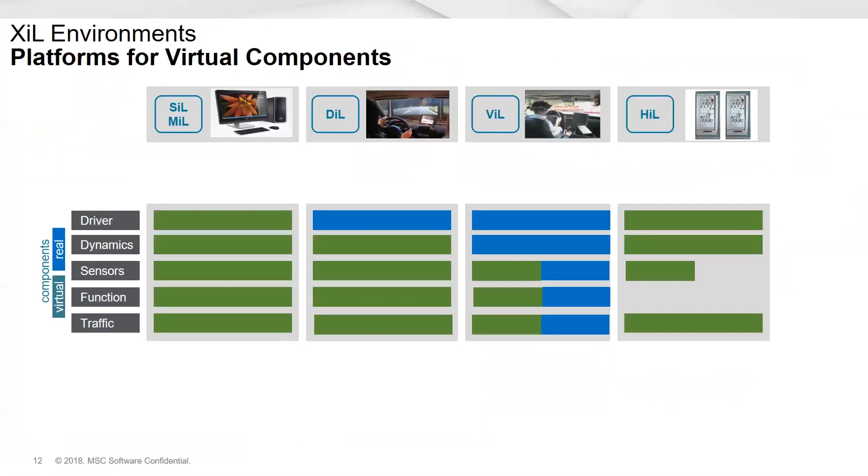Before we proceed, a key thing to mention is that in any process moving from simulation to a verification and validation or testing process, a key aspect is how VTD can move from software in the loop or model in the loop to driver in the loop, vehicle in the loop, or hardware in the loop.

This seamless ability to move between different types of environments gives our tool a lot of flexibility. If you look through each of these sections, anything marked out in blue is running in real time or is a real component, while the ones in green are virtual components.

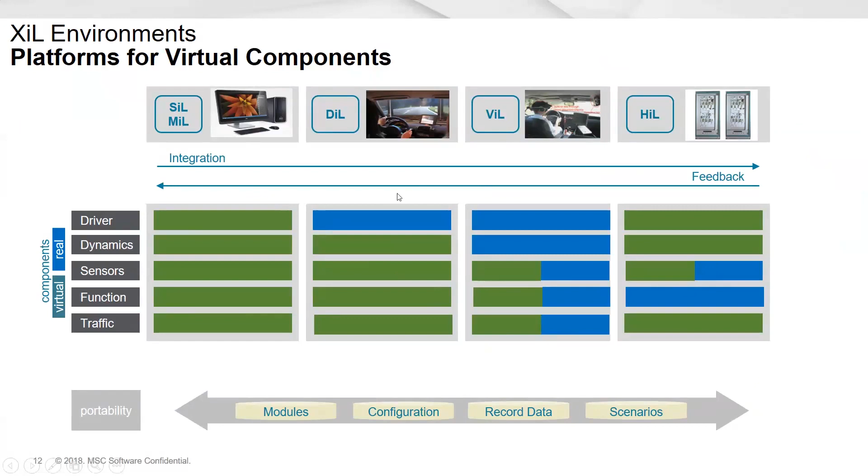For example, in a vehicle in the loop situation, you could have virtual sensors and real sensors combined, or virtual and real traffic combined. With hardware in the loop, you can also have a real ECU plus real sensors combined. The fact that we can move between these functions easily gives a lot of freedom and flexibility, which is what our customers prefer.

Going to the next step, into how Virtual Test Drive works. This is a one-slide summary of the workflow itself, and I will go into each of these sections in more detail as we continue through this presentation.

The first step when designing or working on an autonomous or ADAS function is to create or build out a 3D environment. There is a way, in fact multiple ways, to build out the static content, which I will describe in the next few slides.

The idea is that you generate a 3D environment with OpenDRIVE files to define the road networks, with graphics to define road furniture like buildings, trees, and signposts. Then, to define the road surface layer itself, you can add OpenCRG road file format data on top to define road surface friction, potholes, speed bumps, etc.

Once the 3D environment is defined, the next step is the dynamic aspect. Think of the 3D world as the static aspect, while the dynamic aspect covers all traffic elements: your subject vehicle, multiple other vehicles, traffic lights and their behavior—anything that contributes to creating a maneuver or scenario is done through our scenario editing tool. More details on this will come in later slides.

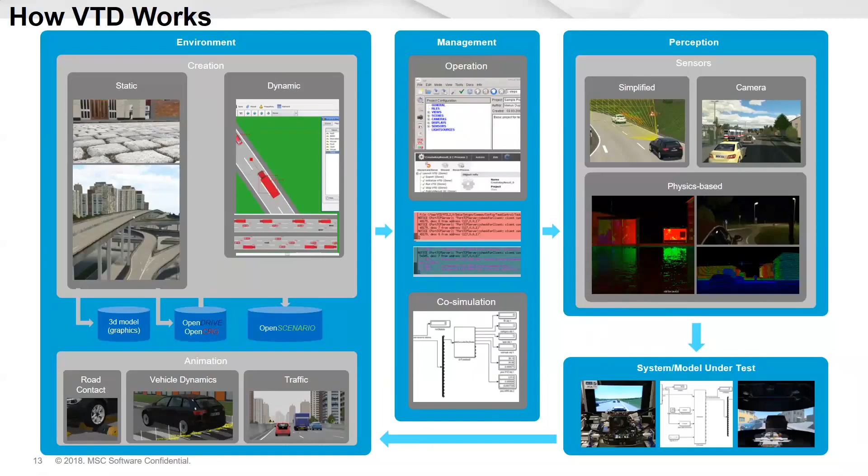The shadows that we project are fairly accurate, and we're able to take a lot of detailed material properties into account when doing this kind of animation. This is the advantage of using something that's fairly photorealistic in its rendering. Weather conditions like rain, road wetness, and road surface friction can all be taken into account as well.

So the first thing is building out 3D environments. There are two different approaches to build these out. My colleague Luca had presented briefly on this in his webinar a month or two ago, but the basic idea is you can either use a measurement-based workflow or a modeling-based workflow. The modeling-based workflow means you have no dependence on any type of measurements, and you can parameterize it.

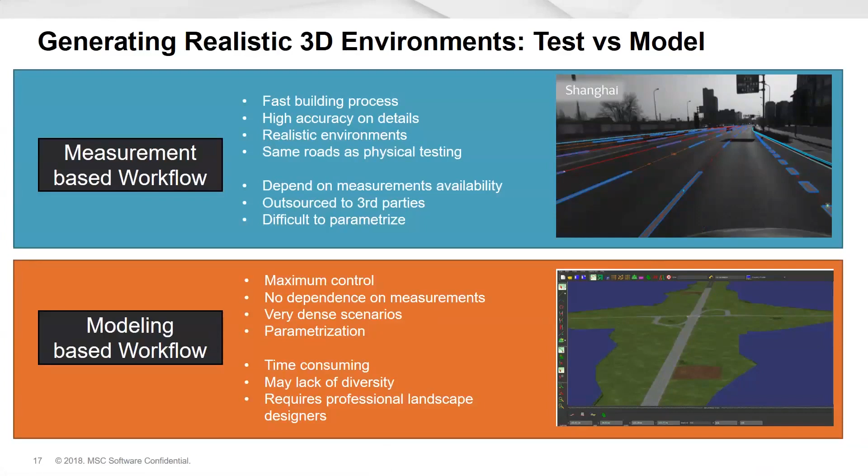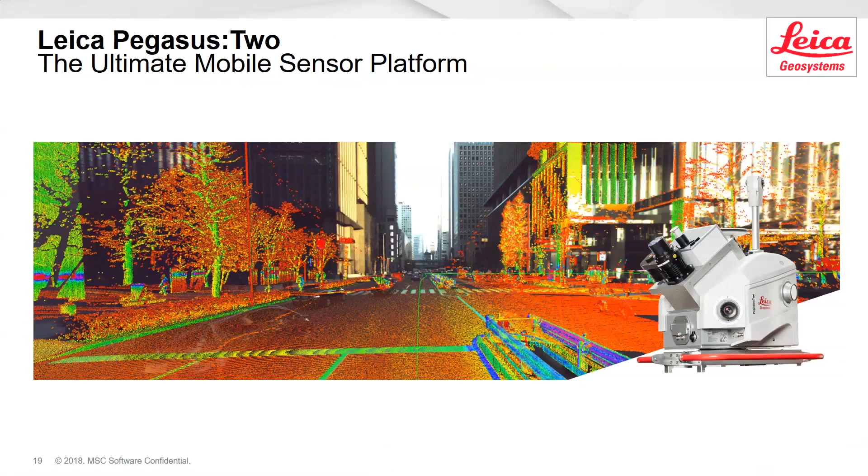When we go to a measurement-based workflow, we've been working with our partners at Leica Geosystems, and they have this unit called the Pegasus 2 that has multiple built-in cameras, a LiDAR sensor, and a precision GPS unit from Novatel, and is mountable on the roof rack of a vehicle.

You're able to get 360-degree imagery from this. The key aspect is you can drive close to highway speeds, up to 100 kilometers an hour, and scan the roads, then extract the data using the software Leica has built out to convert a lot of this data into the OpenDRIVE file format and export that into VTD.

Today we're focused mostly on getting the road information, the lane information, anything that pertains to OpenDRIVE. We're working on an OpenCRG extractor as well to get the road surface information, and longer term we'll be able to extract building textures and formats as well.

Once the 3D environment is built out through this measurement-based approach, the next step is to create a scenario. We have a tool within VTD, our scenario editor. One key thing to mention is that we support OpenSCENARIO today, and as the OpenSCENARIO standard continues to evolve, we will continue supporting it with our tool.

We have the ability to inject not only single elements of traffic, but also bulk traffic as needed within this inner and outer radius. You can specify different types of maneuvers for the vehicles. We can also do traffic light phasing and traffic light behavior, and we have various trigger options based on time to collision or pivoting about a certain vehicle.

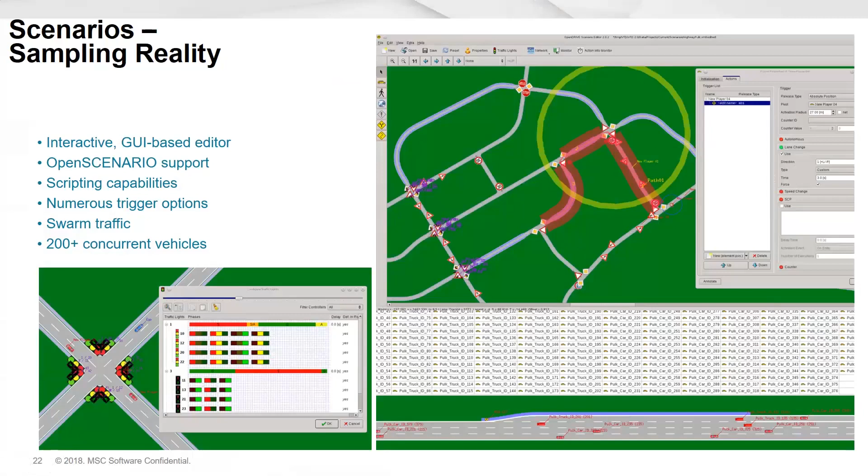The second part about scenario editing and graphics is that with each of these vehicles, you can either have what we call autonomous or deterministic behavior—meaning I could set up a vehicle and just let it follow the rules of the road, maintain speed limits, follow all traffic signs, and it will drive around very safely, trying its best to avoid any collisions or accidents.

The other thing we could also do, on the other extreme, is to give a vehicle a certain speed and a certain path, or any one of these, and then just have it do that and ignore everything else going on in the road. You can have it go into the opposing lane. You can do all of those kinds of things within VTD.

With VTD, we are able to integrate any third-party vehicle dynamics as needed, but we also have our own. VTD has two different levels of vehicle dynamics built into it, and we've also integrated our Adams Real Time, our highest fidelity vehicle dynamics model to date, available within VTD to do high fidelity ride comfort or more detailed limit handling simulations that current parametric models will not be able to handle.

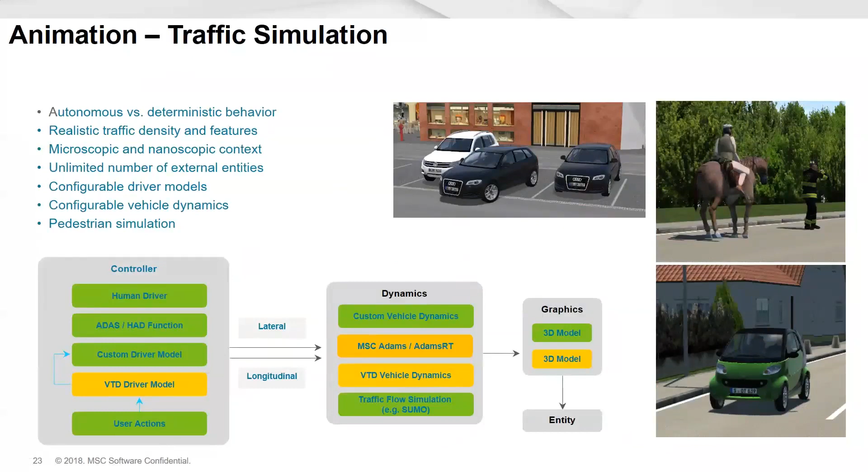We also have our own pedestrian simulation models that we are currently using within VTD.

So we do have the ability to create various types of scenarios and run them within VTD. Apart from that, we provide customers with Euro NCAP scenarios - there are about 16 or 20 currently - for them to be able to do any type of Euro NCAP scenario simulations. And apart from that, we have a bunch of other example scenarios running within VTD as well.

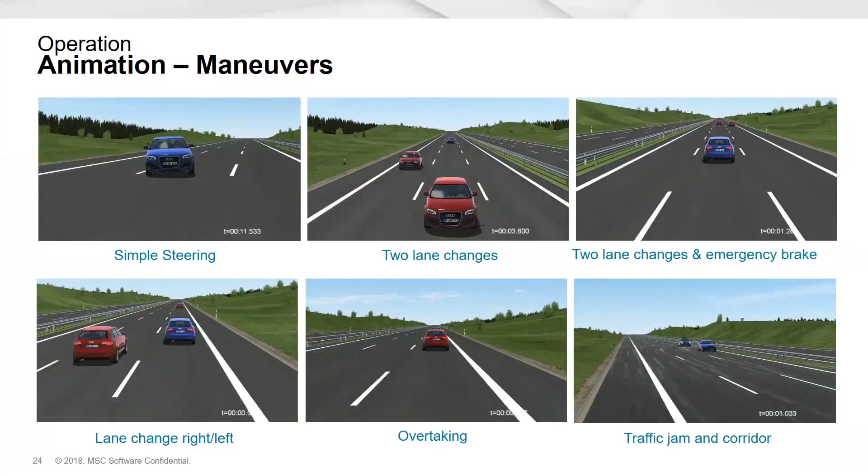So going from the execution of the scenario to being able to run it, the next step, like I mentioned in that workflow slide, is sensor modeling and doing perception studies. Now there are two ways to address this perception aspect.

One is doing the post sensor fusion, object list based perception, which is mostly used for motion planning and control. And the other side is the perception aspect itself, which deals with camera models or LiDAR models to do actual perception work.

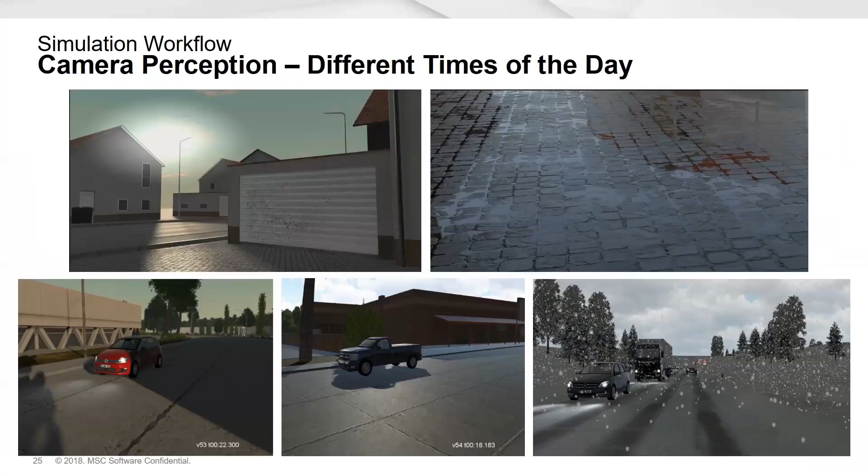As you can see here, we're able to take into account different weather conditions, different times of day through our physically based rendering approach, which means we apply detailed materials and textures per element in VTD and are able to get different returns of light for doing very accurate sensor modeling.

We also have the ability to do headlight simulation and headlight intensity simulations, taking into account different weather conditions, different reflections, and all of those kinds of things, whether it's wet or dry, being able to take all of that into account.

Given the fact that you can do a lot of this in software in the loop, the next natural progression is a hardware in the loop approach, where you can put the camera itself that you're using for your automotive application in front of a screen and have VTD run the simulation in front, to see how well the camera is able to detect objects.

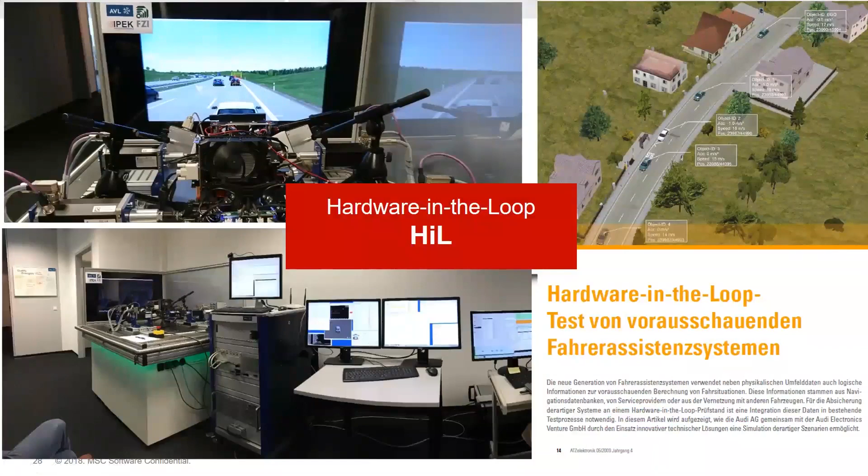The workflow looks something like this, where you have the scenario itself being run with some traffic simulation. You have your vehicle dynamics in here, and then the image generation goes into a screen that the camera perceives, and then the driving function, if you have any, can be deployed directly within VTD, and you can see how the whole system works together. It's a closed loop operation, running in real time.

The other approach we can also use is a video interface box that would replicate the imager, bypassing the camera lens and feeding data directly into the camera ECU. This would work well in high contrast situations where the monitor might not be able to capture the image well enough for the camera to perceive.

So given that, moving on from cameras, we also have the ability to take into account LiDAR simulations, where we do physics-based LiDAR point cloud generation, calculating the intensity of these point clouds based off the distance from the subject vehicle, and we color code all the different points.

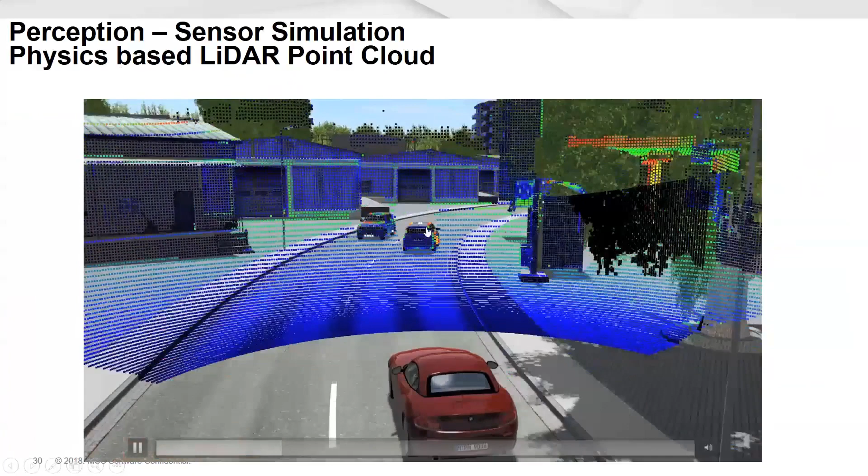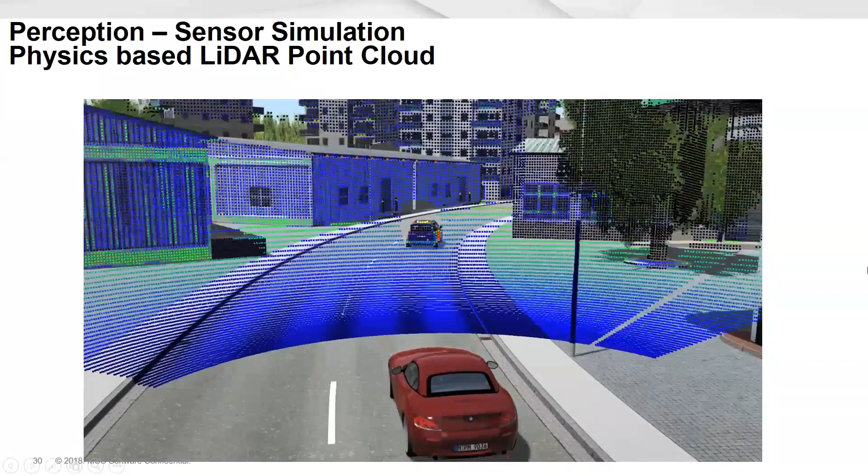Here you can see that when the light hits this vehicle, it doesn't just pass through it, so there is this empty zone here. We're trying to be very physically accurate in terms of how we calculate the LiDAR hit points and the returns within VTD. This point cloud simulation runs today in real time using an NVIDIA GeForce GTX GPU.

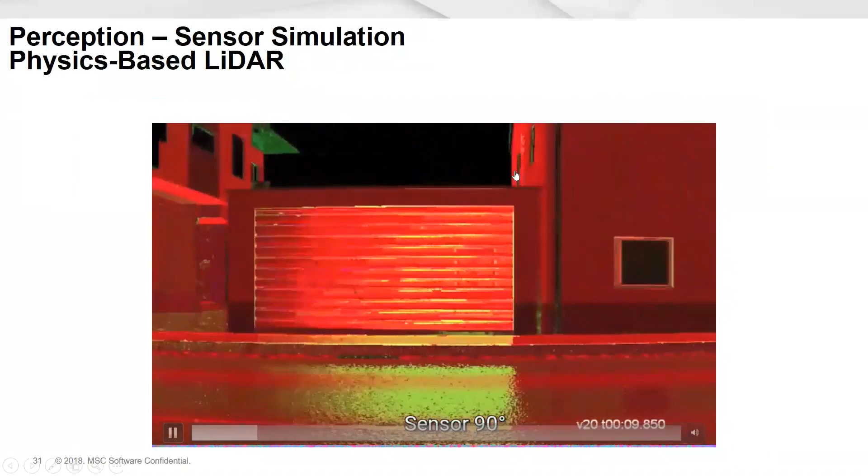We also, with the use of NVIDIA's Optix ray tracing capabilities, are able to do real-time ray tracing here, as you can see. In this example, we've color-coded the environment into red, green, and blue, where red is the direct hit of light, green is the first reflection, and blue is the second reflection.

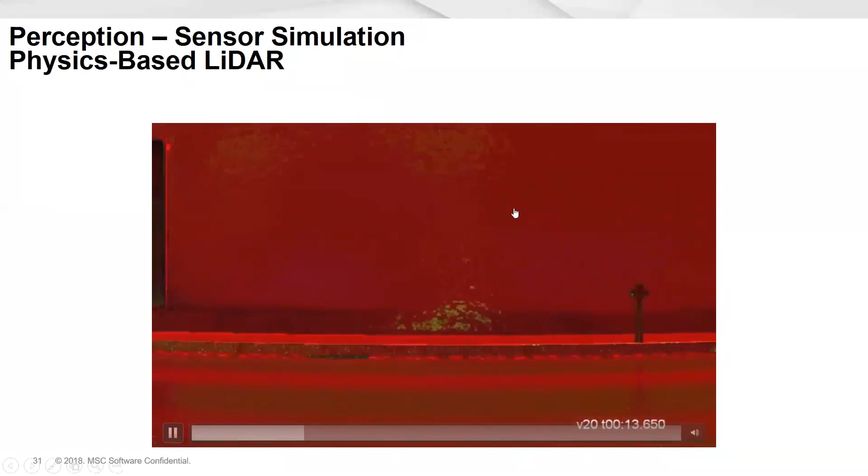So as you can see here, if the wall is rough, the light does scatter and disperse, and we're able to take those things into account when running this simulation in VTD.

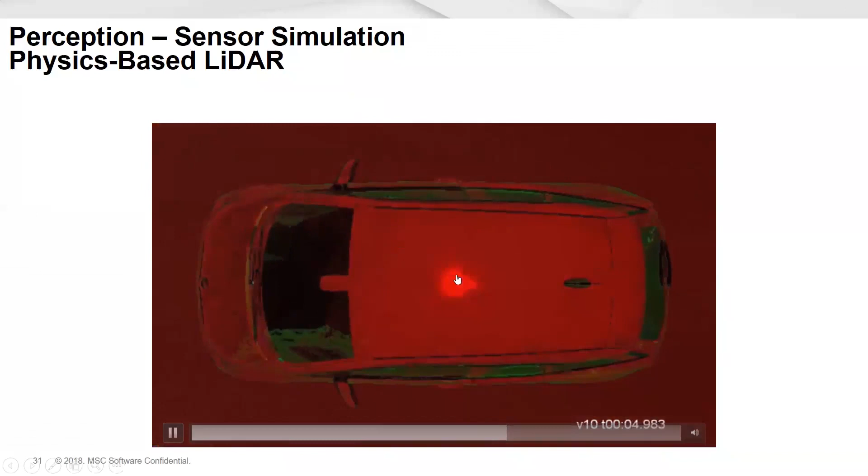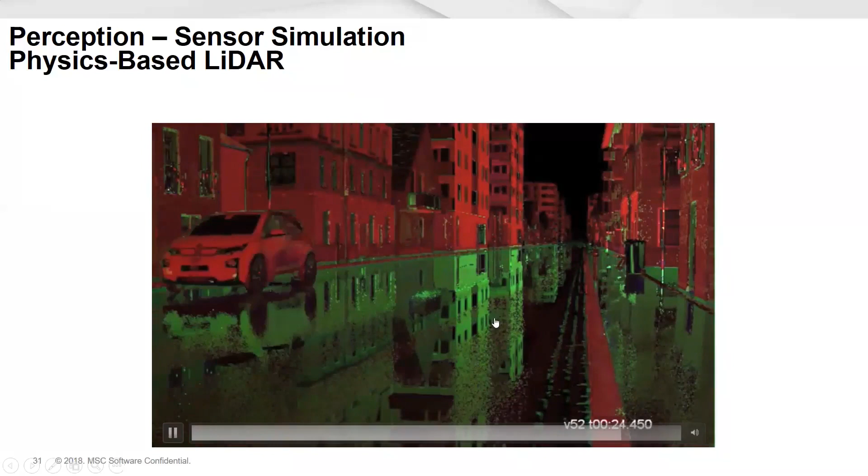Apart from that, not only with different types of surfaces, but when you have a clean versus a dirty surface, you'll see there is a difference in the surface reflection as well. And when you go between dry and wet, again you see a big difference in how much of that green light increases versus the red, because you're seeing more of the reflected light. We're able to take a lot of this into account in VTD using the ray tracing engine and running it in real time.

So this is really important for a lot of the LiDAR simulation work that people are doing on the perception side.

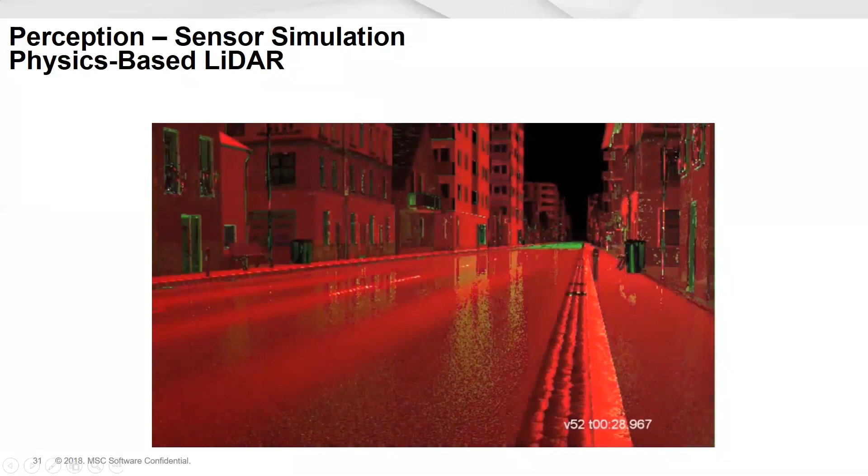Going into the post-perception aspect a little bit here, and briefly staying on the perception part, we can also do color coding of objects. So if you're doing semantic segmentation studies, we have the ability to color code all the different objects in the environment, and you can use this to do semantic segmentation studies in VTD.

As I briefly mentioned, we also do the post-perception, the ideal sensor or object-list-based sensor, where we put bounding boxes on each of these different objects and are able to derive the ground truth information for each of them.

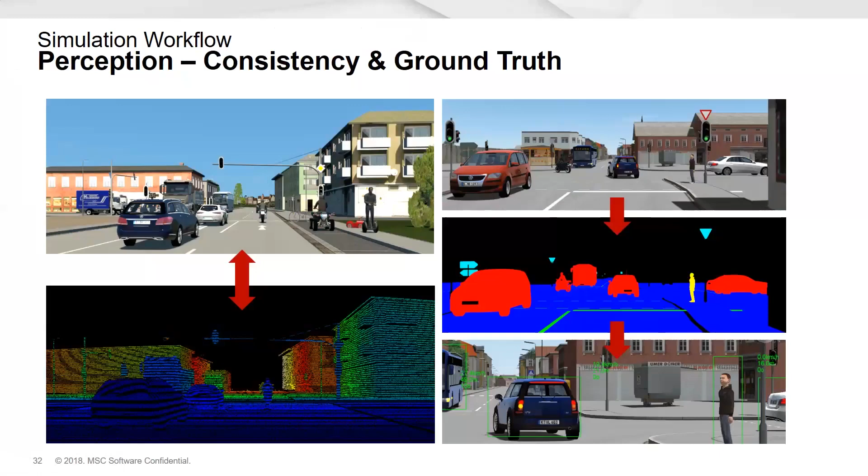Now, if objects are partially or fully occluded, we're also able to take that into account by not only measuring the distance from the subject vehicle, but also measuring the occlusion through an occlusion matrix, calculating what that occlusion matrix is and presenting it back to the user when the simulation is running. So you get an account of both partially and fully occluded objects for each of these object-list-based sensors.

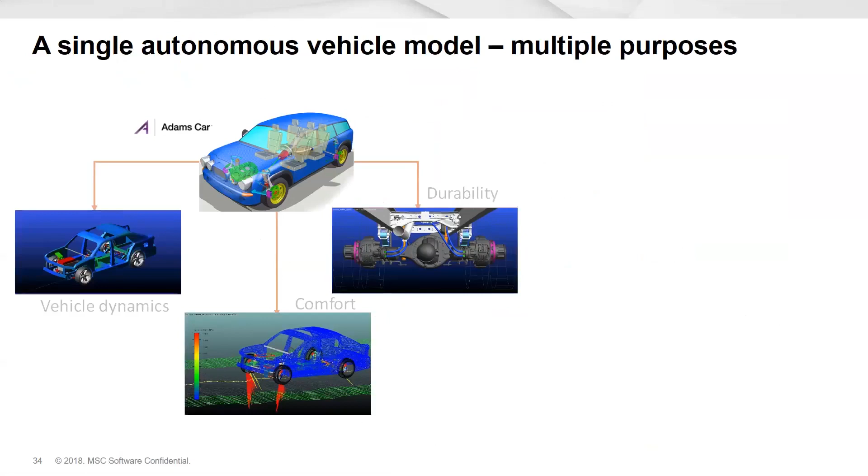Also, since VIRES and MSC are now all part of the same company, we've been working together to closely integrate our high-fidelity Adams Car vehicle dynamics models with VTD. Just a brief mention of what Adams is: it's our multi-body dynamics solution that's been around for over 40 years and is one of the most trusted vehicle dynamics software tools in the world, the highest fidelity vehicle dynamics software tool available in the market today. We're able to connect Adams to VTD to run our simulations as a co-simulation or as an FMU.

The advantage here is that you can go both ways, where you can run Adams in real time to take into account limit vehicle dynamics that has enough nonlinear behavior that simple or parametric vehicle dynamics models don't take into account. The second thing you can do with VTD is run it slower than real time, so you can do higher fidelity vehicle dynamics or modeling aspects like ride comfort or durability studies within Adams. So the 3D environment and the sensors come from VTD, and based off of the perception, the vehicle behavior and analysis can come from Adams.

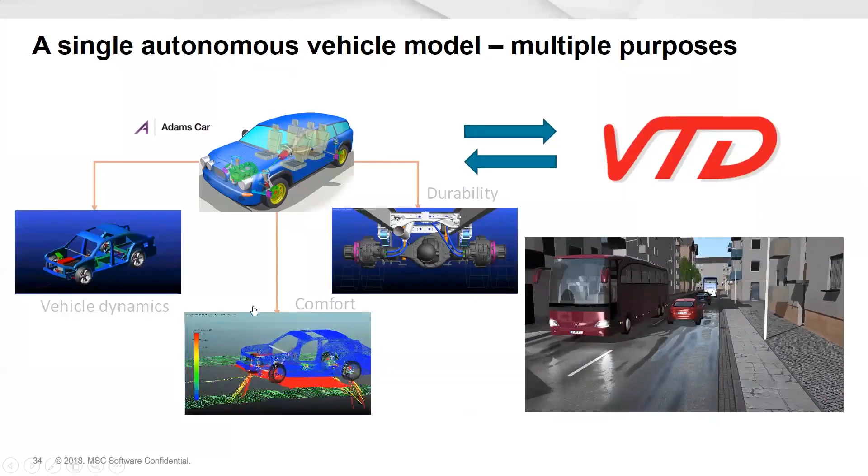Again, this is what the workflow looks like for a driving simulator type approach. You can have multiple image generators and combine these channels so the viewer feels they are looking at a single image, or like they are driving in an actual environment. You can either choose to use Adams real time or any other vehicle dynamics engine, and the controls for steering, brake, and throttle in this case come directly from the human being.

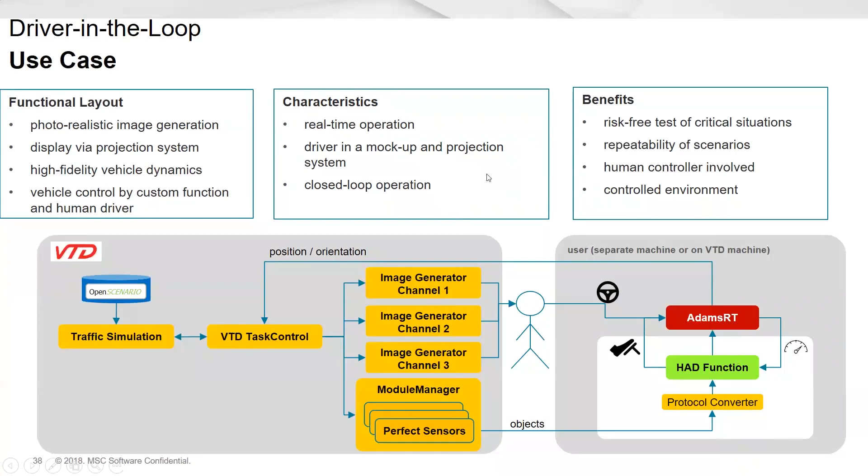Moving on from the different types of applications to a more fundamental question: how do you enable safe autonomy and safe testing? One of the biggest challenges is that the number of interesting miles that need to be driven and the number of scenarios that need to be tested or validated are significantly large. So our team has focused on generating a test automation tool, while also being able to do efficient sampling and generation of scenarios that are fundamental to testing specific ADAS or autonomy functions, trying our best to find the edge cases to see how well the algorithm performs.

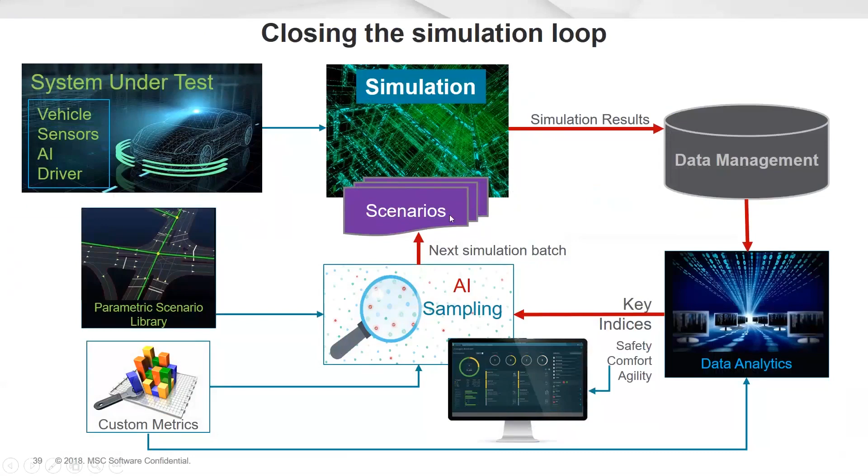Apart from that, we also provide the ability to do automatic post-processing through our data analytics and AI-based, rule-based classification, and provide you with interfaces like this from Tableau, or whatever tool the customer wants to use, to verify and validate their AI algorithms, predict performance, and quantify safety as well.

This basically allows customers to go from model in the loop to software in the loop to hardware in the loop in a very seamless and smooth way. As you go from model or software in the loop to hardware in the loop, the number of tests you need to run has to be funneled down or reduced, because HIL testing is a lot more challenging and expensive than software in the loop testing. So what we provide customers is the ability to suss out the most important scenarios they need to run, and score the relevance for each simulation, then move that on to the next stage, which is hardware in the loop.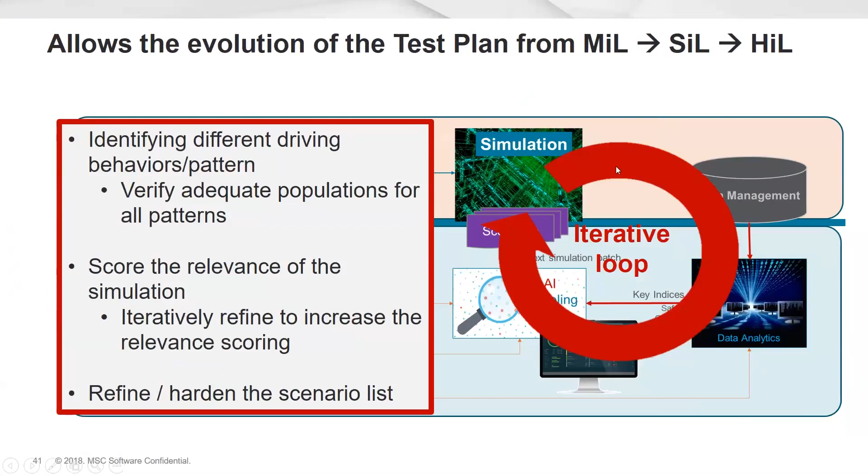That's the aim with our tool, our VTD Scale tool. Here we have an example of being able to run thousands of simulations in parallel with VTD. We could vary the static environment, change the error injection, and change any of the dynamic scenario parameters as well. This allows us to create a very robust set of scenarios that could really push VTD, push the algorithms to the edge, and generate a lot of productive value out of what we can do with VTD today, once you scale it up to hundreds of thousands of scenarios.